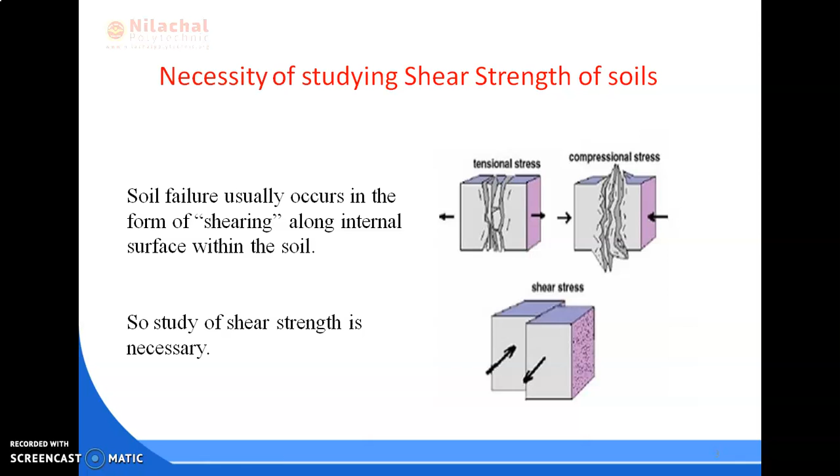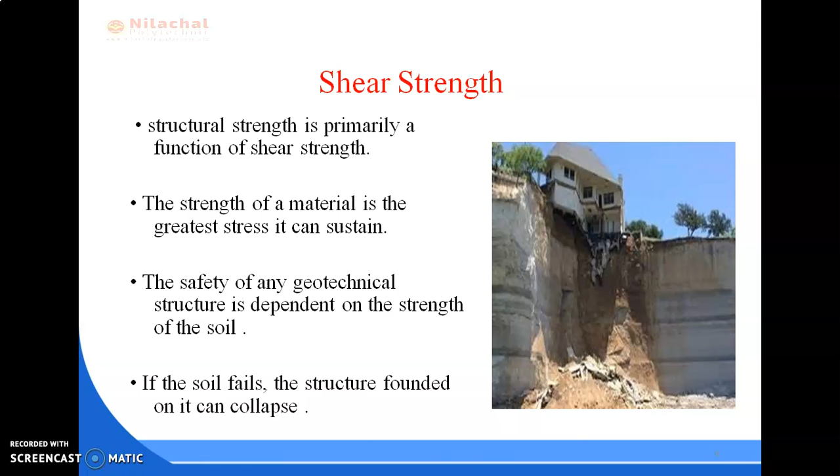Then the introduction of shear strength. Structural strength is primarily a function of shear strength, and the strength of a material is the greatest stress it can sustain. So the safety of any geotechnical structure depends on the strength of the soil. If the soil fails, the structure founded on it can collapse. Thus, shear strength is the capacity of a material to resist both the internal and external forces which slide past each other.

We can also define it like this: the shear strength of soil is the resistance to deformation by continuous shear displacement of soil particles or soil masses upon the action of a shear stress. The failure conditions for a soil may be expressed in terms of limiting shear stress called shear strength, or as a function of the principal stresses.

All stability analysis in soil mechanics involves a basic knowledge of the shearing properties and shearing resistance of the soil. So shear strength is the most difficult to comprehend and one of the most important of the soil characteristics.

Basically, the shearing resistance of soil is constituted of three components. The first is the structural resistance to displacement of the soil because of the interlocking of the particles. The second is the frictional resistance to translocation between the individual soil particles at their contact points. The third is the cohesion or adhesion between the surfaces of the soil particles. So these are the basic three components of shearing resistance of soil.

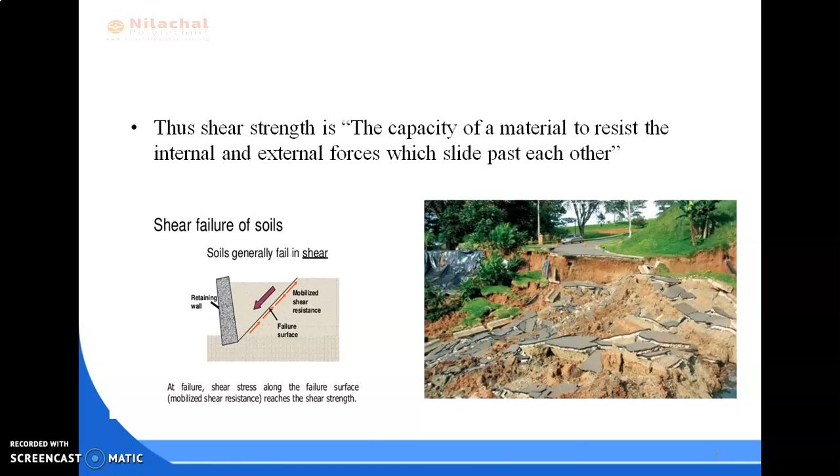The shear strength in cohesion-less soil basically results from intergranular friction alone, while in other types of soils it results from both internal friction as well as from cohesion.

Next is the significance of shear strength. Engineers must understand the nature of shearing resistance in order to analyze soil stability problems such as bearing capacity of soil, and also the slope stability of soil.

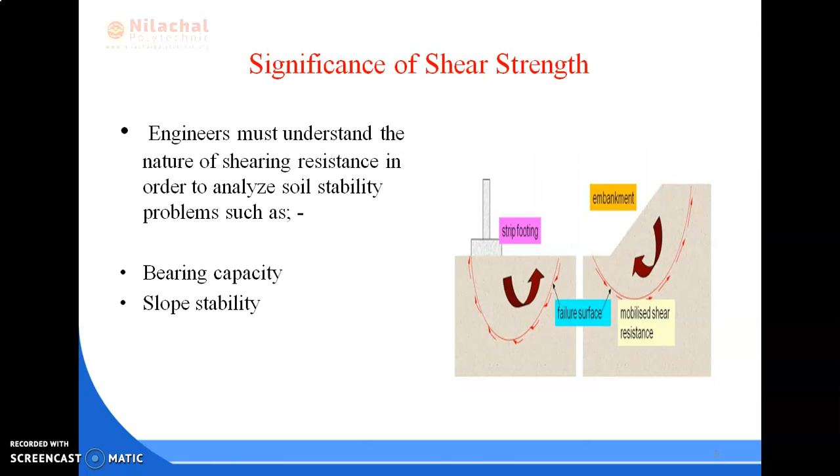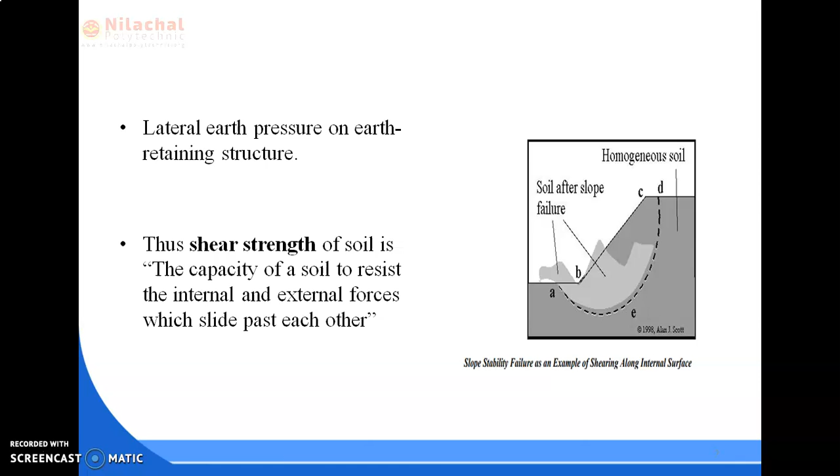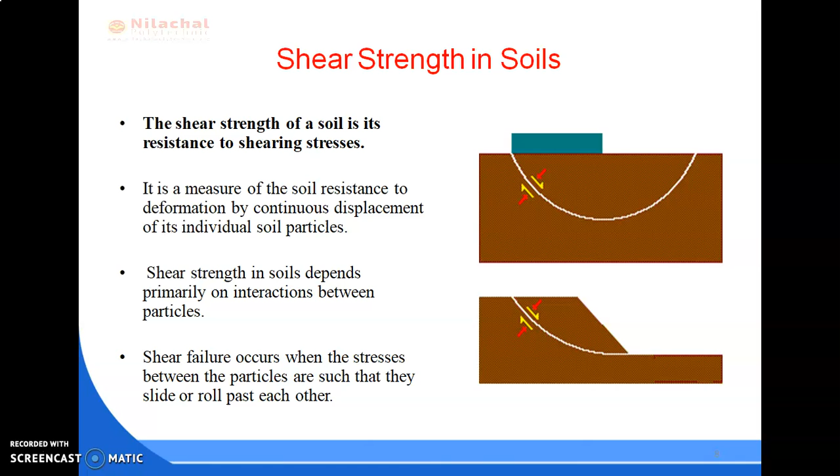The shear strength of soil is the capacity of soil to resist the internal and external forces which slide past each other. It is also the resistance to shearing stresses. Shear failure occurs when the stresses between the particles are such that they slide or roll past each other.

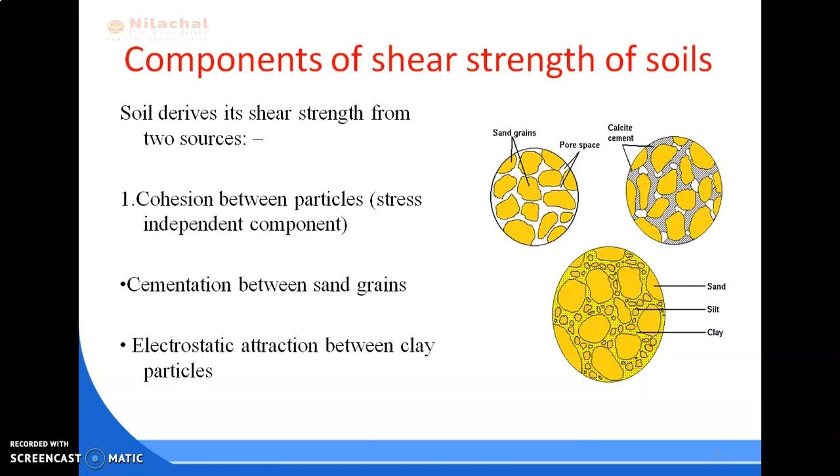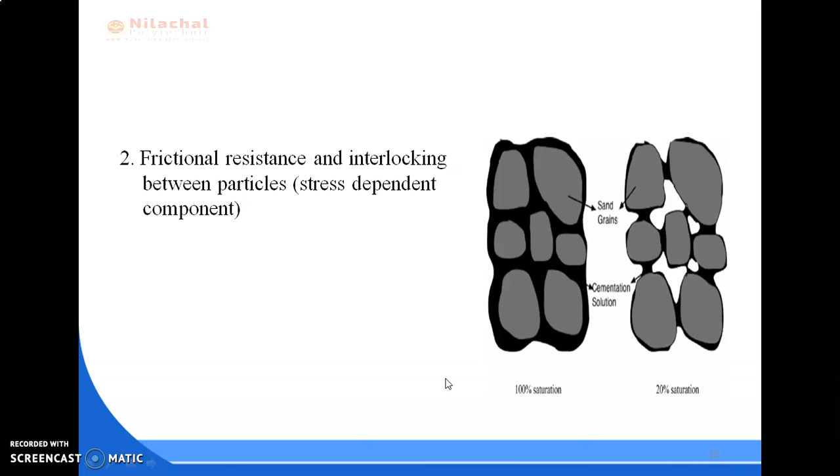Next is the components of shear strength of soils. Soil derives its shear strength from two sources. First is the cohesion between particles, that means cementation between sand grains, electrostatic attraction between clay particles. Second, the frictional resistance and interlocking between the particles. As shown here, the figure shows the cementation and the sand grains. So these are the basic two components from which the shearing resistance of soil is developed.

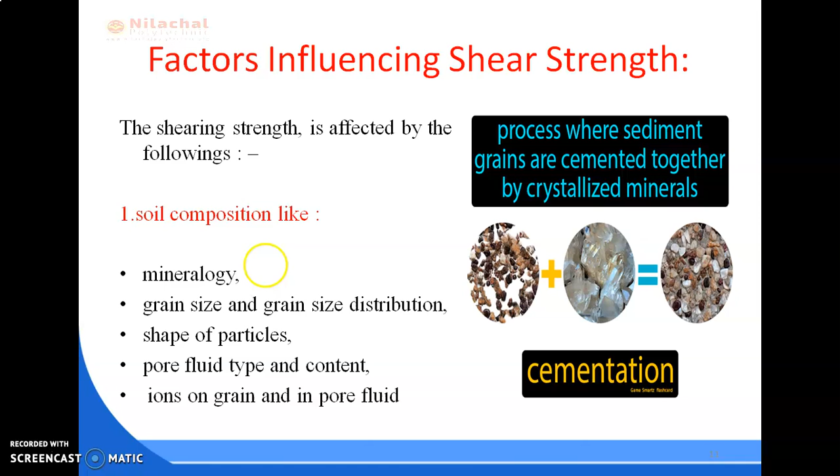Next is the factors influencing shear strength of soil. The first component is soil composition, like mineralogy, grain size and grain size distribution, shape of the particles, pore fluid type and content, and ions on grain and in pore fluid. So these are the different soil compositions which affect the shear strength of soil.

Second is the initial state of the soil. The state can be described by terms such as loose state of soil, dense state of soil, over consolidated, normally consolidated, stiff soil, soft soil. So according to their state, the shear strength of soil also depends on it.

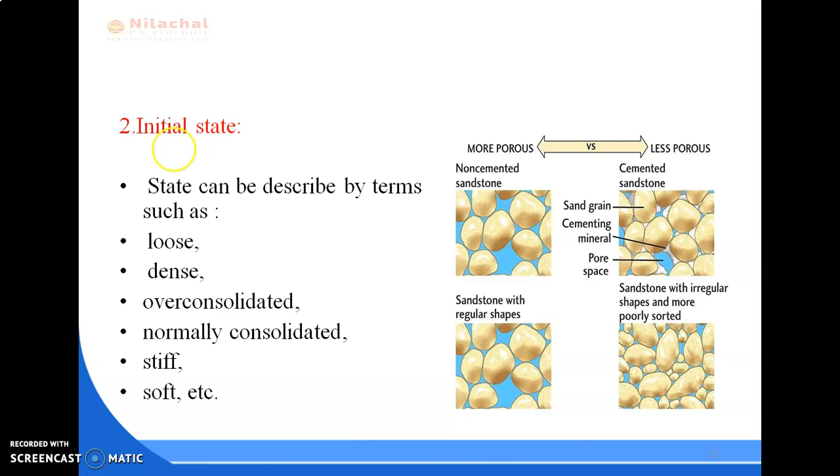For example, if the soil is more dense or more compacted, then obviously the shear strength of the soil is more. On the other hand, if it is loose soil, or the amount of voids or pores present in the soil is more, then obviously the shear strength of soil is less.

Number 3 is the structure. It also plays a major role in determining the shear strength of soil, like the manner in which the particles are packed or distributed - loosely packed or closely packed. If loosely packed, strength is less. If more compacted or closely packed, then obviously its strength is more.

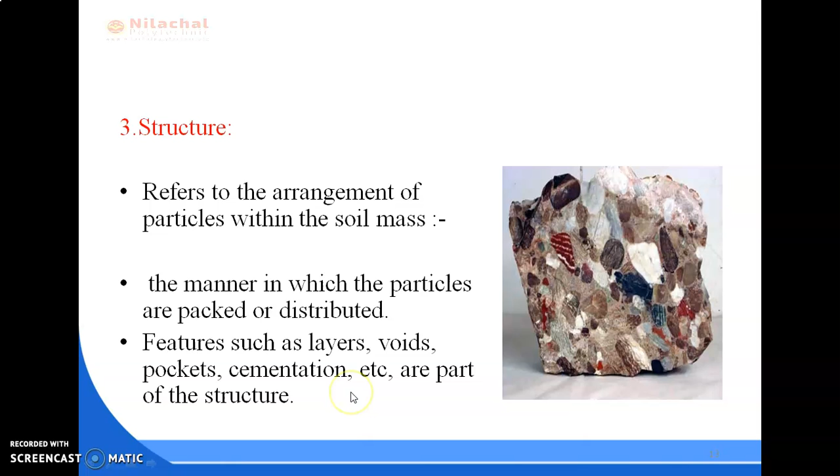Features such as layers, voids, pockets, cementation, etc. are part of this structure.

Next term is stresses. Gravity generates stresses, which is force per unit area in the ground at different points, and a stress on a plane at a given point is viewed in terms of two components.

First is the normal stress, notation is sigma. It acts normal to the plane and tends to compress soil grains towards each other, due to which volume change occurs. So after applying this normal stress, the volume decreases, and it is always applied normal or perpendicular to the plane.

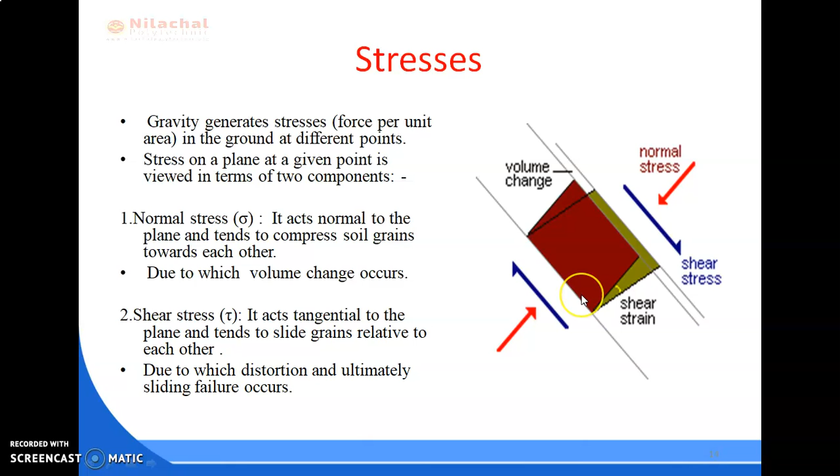It acts tangential to the plane and tends to slide grains relative to each other. So after applying this shear stress, the particles try to slide over each other, due to which distortion and ultimately sliding failure occurs.

Next is the important term, which is the Mohr-Coulomb failure theory or criteria. This is an important question for you.

Through a point in a loaded soil mass, different planes pass, and stress components on each depend upon the direction of the plane. It can be shown that there exist three typical planes mutually orthogonal to each other, on which the stress is wholly normal and no shear stresses act.

These planes are called the principal planes, and the normal stresses acting on these planes are called principal stresses. In order of decreasing magnitude of the normal stress, these planes are called major, intermediate and minor principal planes.

This Mohr-Coulomb theory states that a material fails because of a critical combination of normal stress and shear stress, and not from either maximum normal or shear stress alone. So failure always occurs due to a combination of both normal stresses and shear stresses.

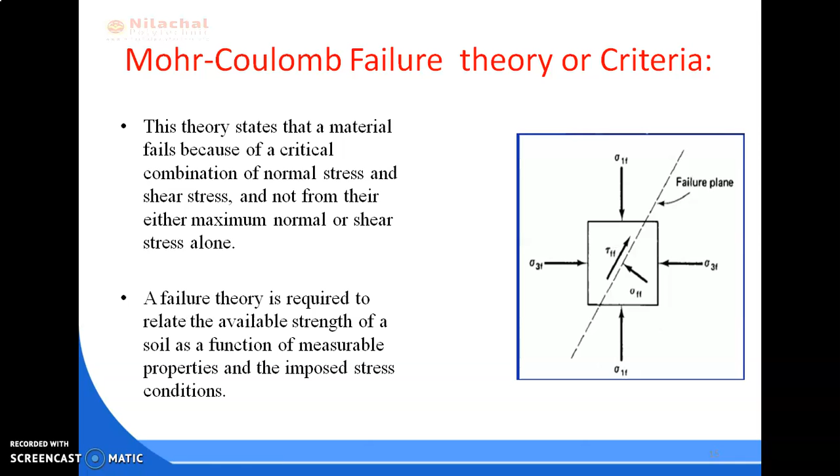A failure theory is required to relate the available strength of the soil as a function of measurable properties and the imposed stress condition, so it is necessary to know the failure theory.

The Mohr-Coulomb failure criteria is commonly used to describe the shear strength of soil. Its main hypothesis is based on the premise that a combination of normal and shear stresses creates a more critical limiting state than would be found if only the major principal stress or maximum shear stress were considered individually.

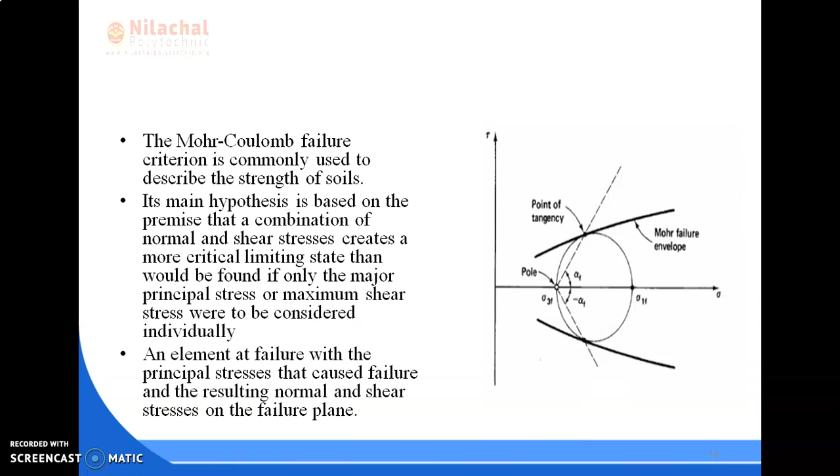So an element at failure has the principal stresses that caused failure and the resulting normal and shear stresses on the failure plane. We assume that a failure plane exists, which is not a bad assumption for soil, rocks, and many other materials.

We always have to assume that there may be a chance of a failure plane existing, so that we take preventive measures before construction.

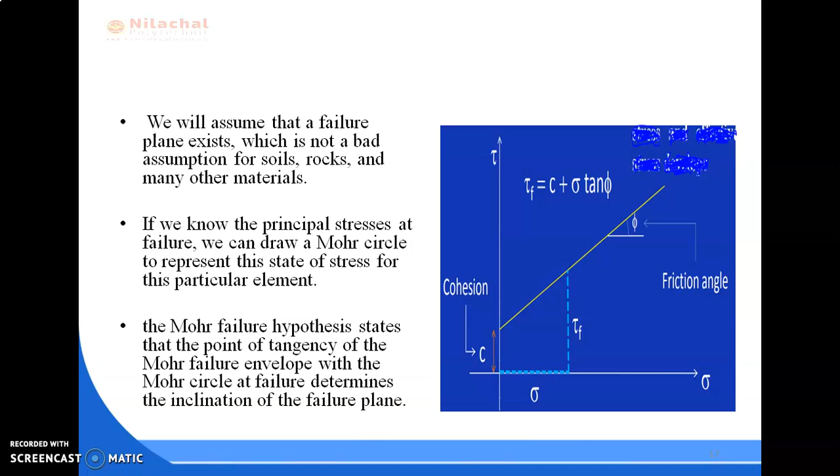If we know the principal stresses at failure, we can draw a Mohr circle to represent the state of stress for this particular element. The Mohr failure hypothesis states that the point of tangency of the Mohr failure envelope with the Mohr circle at failure determines the inclination of the failure plane.

Failure will thus occur at any point in the soil where a critical combination of shear stress and effective normal stress develops. Shear strength consists of two components: one is cohesion and another is friction.

Cohesion and friction are the measures of shear strength. Higher the value of C and phi - cohesion and angle of friction - higher the shear strength of soil.

This big picture shows the envelope, or Mohr-Coulomb envelope.